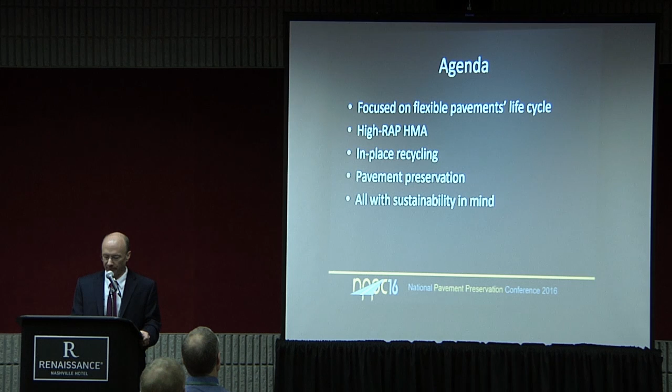Today I'm going to speak on the impacts of pavement preservation and recycled materials on sustainability. I'm going to focus primarily on the flexible pavement life cycle. I won't get into rigid pavement preservation. I'll talk about high RAP HMA. It doesn't exactly fit into pavement preservation, but I think it's relevant for the overall topic. I'll give some examples on in-place recycling, traditional pavement preservation products, and then all of this with sustainability in mind.

I think we all know there's an inherent link between sustainable pavement and pavement preservation. It was asked earlier, what's a definition of sustainability? Sustainable pavement is a safe, efficient, and environmentally friendly pavement, and it meets the needs of today while not compromising the needs of those of future generations. And then the definition of pavement preservation is really to maintain our pavement network in an acceptable, very cost-effective way that extends the life of the pavement, that meets the needs of the road users, all with safety in mind.

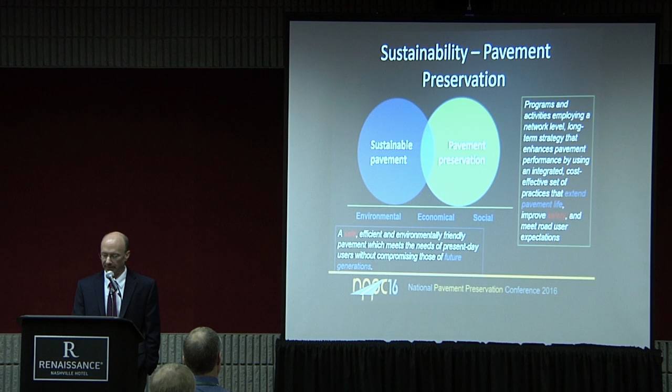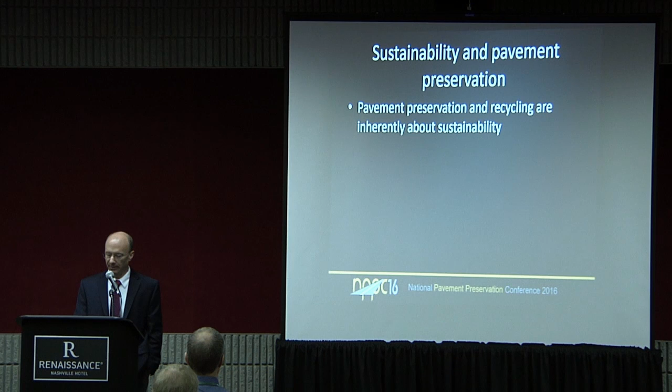I look at the two of those as having as its foundation the environmental, economical, and social aspects. So pavement preservation and recycling are inherently about sustainability. From an environmental standpoint, it's the use of resources and a reduction in emissions and energy like we just heard, and it can also be about using more environmentally friendly products.

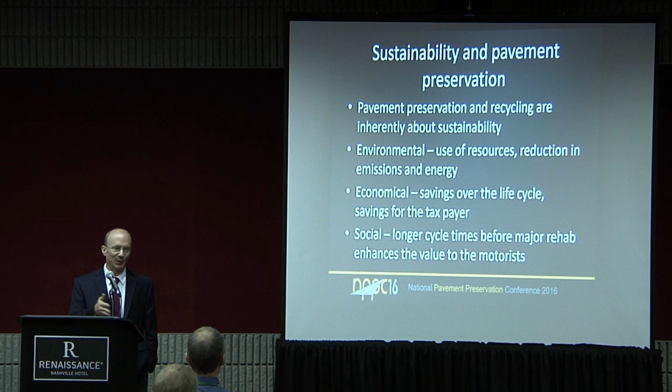Economically, there's a savings over the life cycle of the pavement as we're implementing pavement preservation, and that gives a savings for the taxpayer. And then socially, when we stretch out that time that we need to do some type of major rehabilitation to the pavement, that's enhancing the value to the motorist. If there's less delay due to construction, the more the motorist benefits.

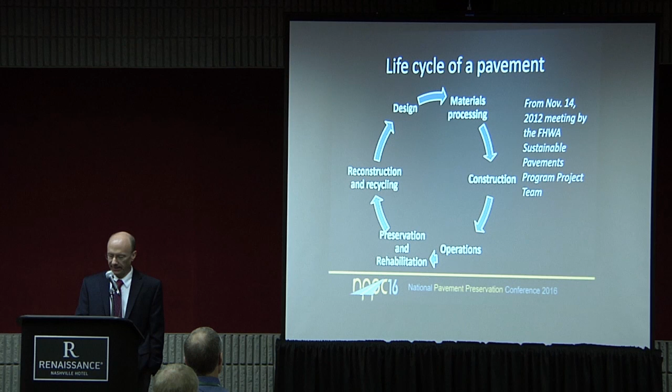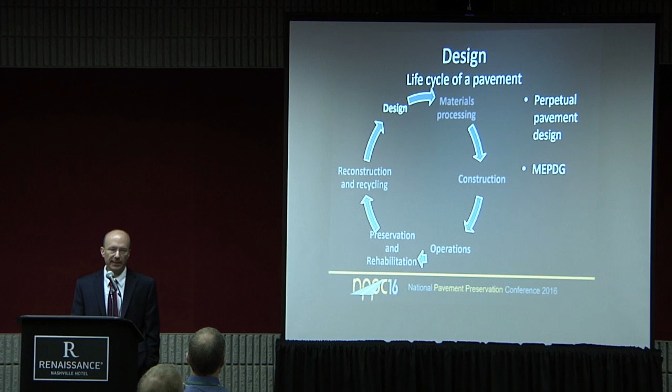So I'm going to talk about the various aspects of the life cycle of a pavement. I get this from an FHWA Sustainable Pavements Task Force where they looked at some of the key things in the life cycle. I'll talk about these individually, some more than others, and I'll start with design. When I say design here, I'm talking about pavement design, starting with some type of basic pavement structure. I won't hit on all the key aspects of pavement design, but we'll touch on perpetual pavement design and then the mechanistic empirical design as well.

I also want to point out that we want to ensure that the top layers are recyclable. Sometimes there's different products placed between layers that may not be as recyclable, and I'll talk about in-place recycling in a minute. And then there's also, from sustainability aspects, opportunities for high RAP in the high modulus rut-resistant layer.

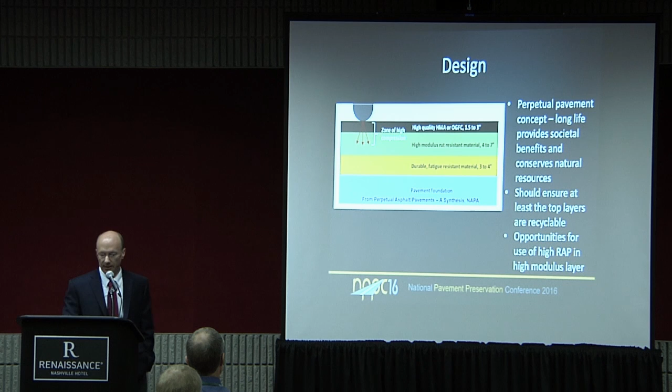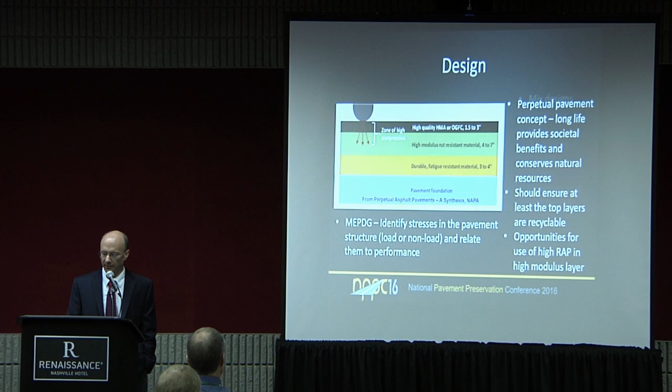Mechanistic empirical pavement design, essentially what that's doing is identifying stresses and strains in the pavement structure, load or non-load, and then relating those to performance. I'll talk about that a little bit more here in a second. Going on to materials processing, I'm focusing mostly on mix designs and materials selected in the mix design.

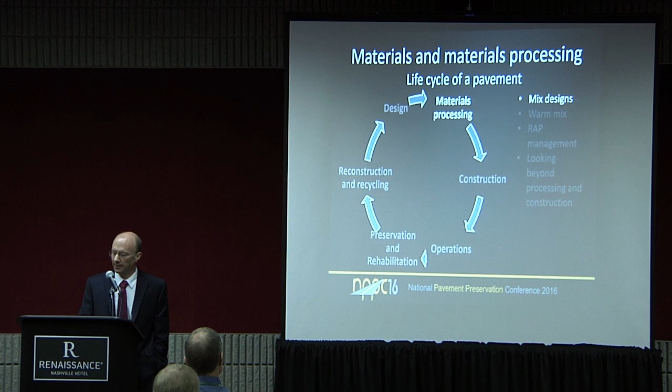There's a lot of other things related to materials, but I'll just stay on the designs here. A lot of people in our industry have probably heard a lot about this balanced mix design concept, where we have a great system in the superpave system where we're designing pavements volumetrically, but as we're getting very high RAP contents, which we'd like to do, now we're challenging the system a little bit in terms of durability.

So a lot of agencies and companies are looking at going beyond the volumetric mix design process and looking at performance-based mix designs. Again, very important when it comes to RAP and RAS, but now we can throw other things in there like rejuvenators, ground tire rubbers, and different things. There's a lot of progress being made in the industry, and a lot of different viewpoints too.

Beyond the mix design, there's also a lot on the characterization and binder testing that's helping us understand what are some key characteristics of the binder properties to give us a more durable pavement.

Some of the mix design tests here, you'll see, are for rutting. The rutting test, the Hamburg on the left, the asphalt pavement analyzer on the right. You don't tend to worry about rutting tests when we're putting high amounts of RAP - we're making it stiffer - but as we're putting rejuvenators in that system, we want to make sure we've not overdosed it in rejuvenator. So we're looking at rutting, and then we have cracking tests. I showed just two of them there, but there's really several cracking tests being used, and that's really, I think, what's helping us make sure we have enough asphalt content or the right rejuvenator in the system - looking at those cracking tests that tell us a lot about durability.

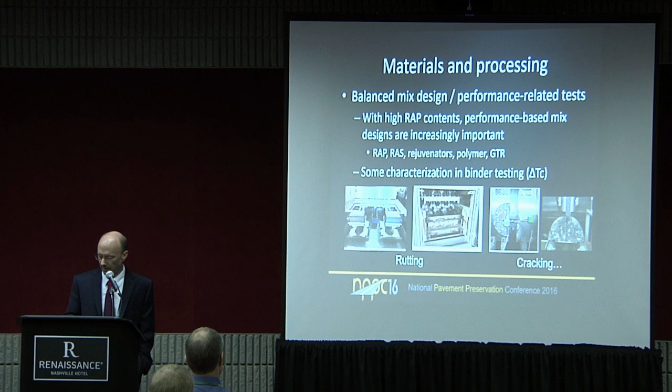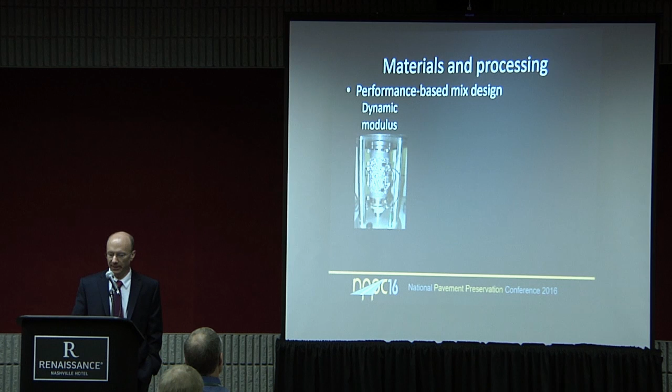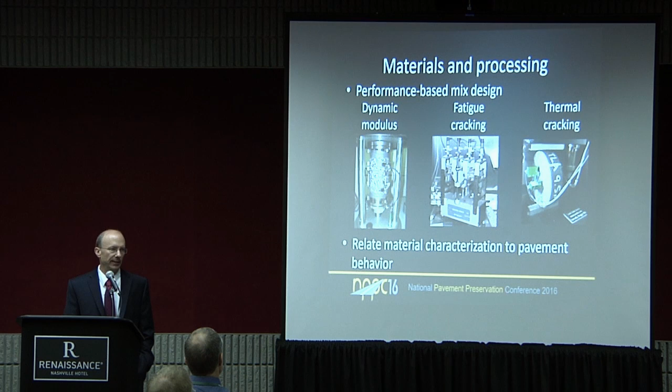From a performance-based mix design, and this is getting more into the mechanistic empirical, we have dynamic modulus, fatigue cracking, and thermal cracking. Again, this is just relating the material characterization to pavement behavior, but these are tools we can use as we're putting high recycle contents into a mix - if these are working correctly, we should be able to see what's the limit on the amount of recycled material, or tell us a lot about the asphalt content.

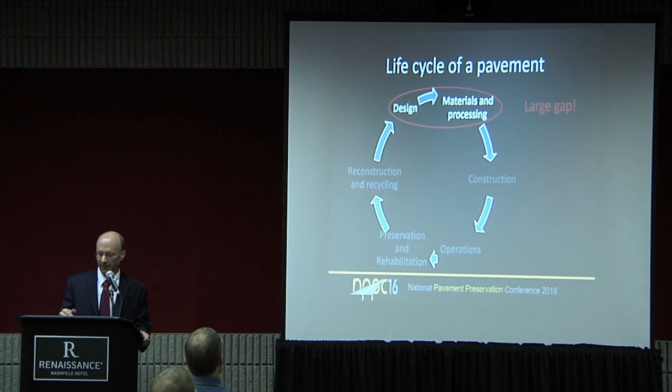But there is a large gap between what we're doing on the pavement design and what we're doing in the mix design and the materials. You look at how DOTs are organized, there's not normally a link there. As we're designing these systems, the pavement designers and the mix designers aren't really communicating. So there's a lot of opportunity there for improvement.

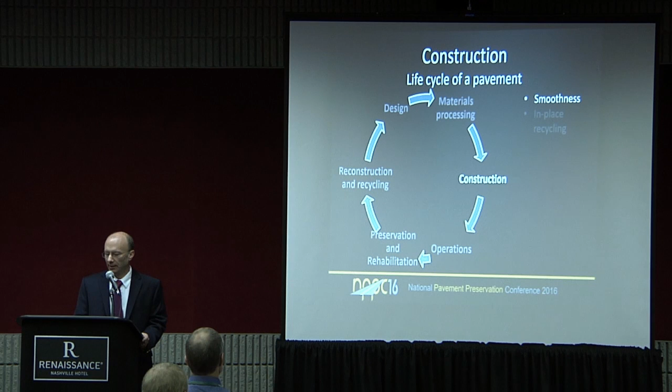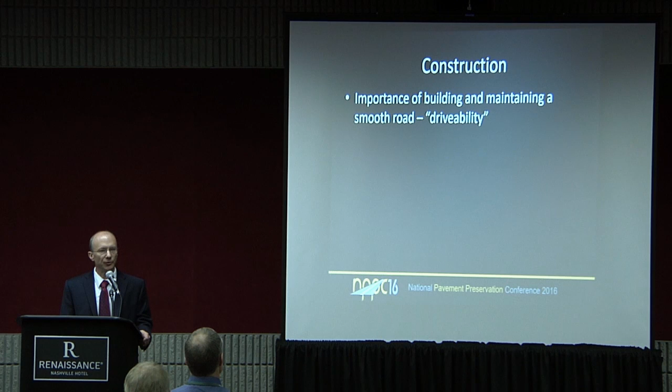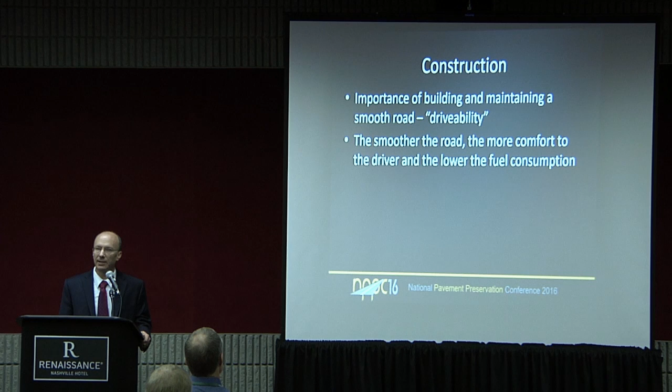Going on to construction and the life cycle, I'm going to talk more about smoothness here, but there's an importance in building a smooth pavement, we know that, but also as we're doing these preservation treatments, we're helping to maintain that smooth road for the drivability aspects for the motorist. So the smoother the road, the more comfort for the driver. There's been a lot of studies showing the lower the fuel consumption is, so some environmental benefits there as well.

In-place recycling has the potential to reduce reconstruction time, and I'll show some examples here in a little bit. And again, as we know, pavement preservation keeps good roads good.

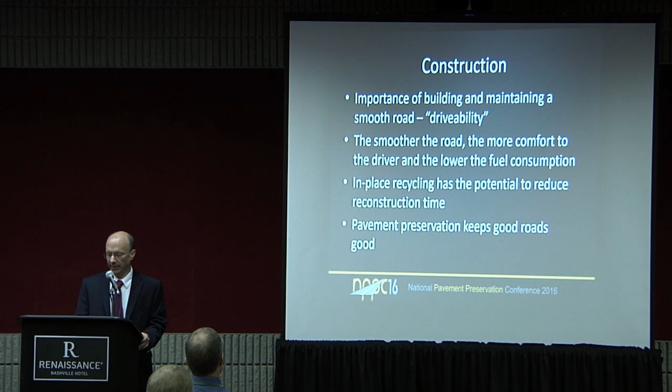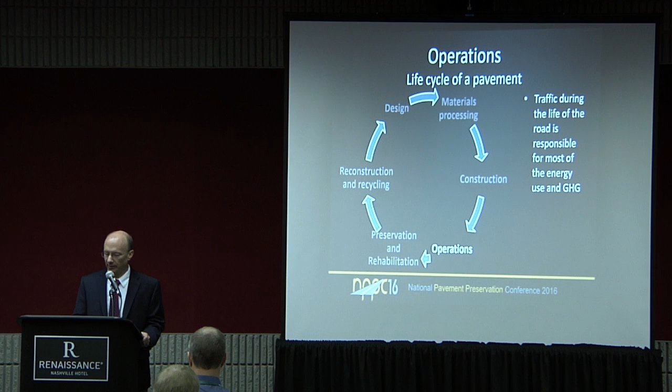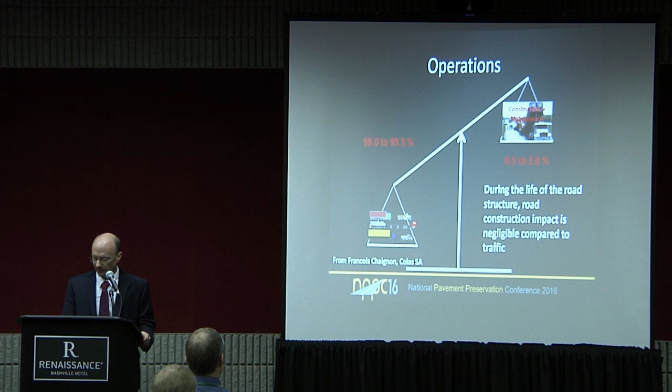On the operations side, I'm looking here at either construction or maintenance of the road, or just the operation of the road in relation to traffic. Really, traffic during the life of the pavement is what's using most of the energy and greenhouse gas - 98 to 99% of emissions and energy from traffic over the life of the road - but I know our focus here is more on construction and maintenance.

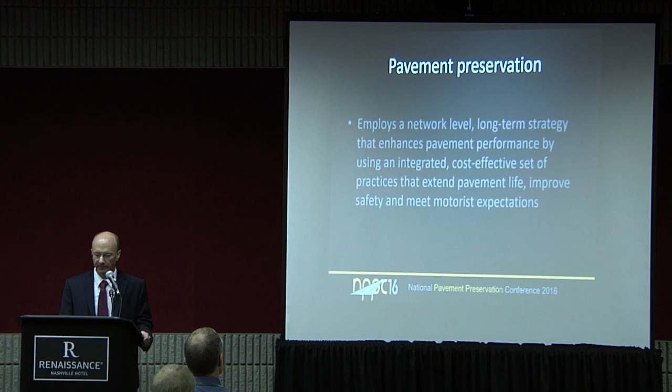So on preservation and rehabilitation, let's go through some things here. I won't go through the definition again of pavement preservation, but we're using products like chip seals, microsurfacing, crack sealing, and thin in-place recycling to help us in those preservation goals.

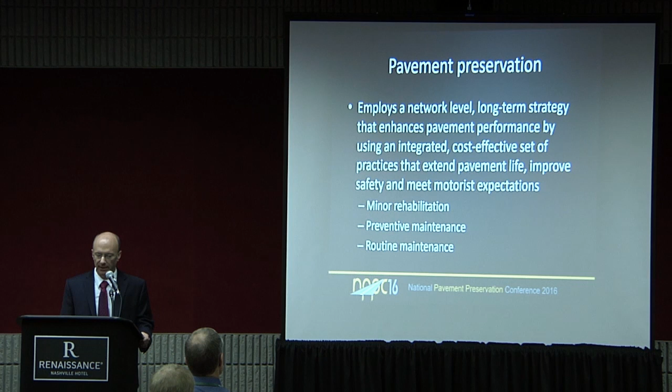I'll focus more on the traditional preservation products here, looking at a study that Gary Hicks did in 5 states, which he presented at a 2010 California Chip Seal Association meeting. They looked at the life extensions of preservation treatments on flexible pavements, and for chip seals they found a range of life extension: chip seals 4 to 8 years, slurry seal 3 to 7, micro 3 to 8 years, and crack sealing 0 to 4.

And a separate NCHRP study found that Thinlay had a life extension of 7 to 11 years.

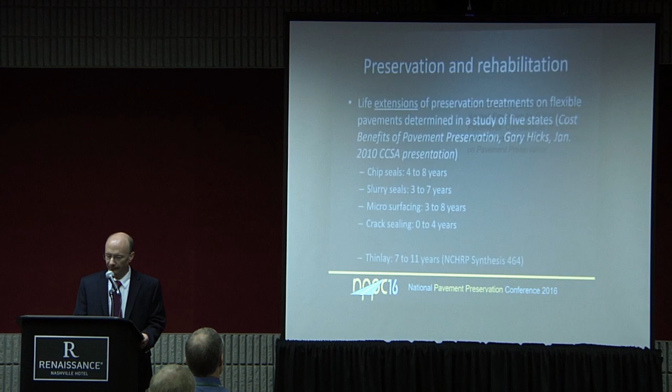Going to a separate study now looking at the emissions of 3 products. If you look at the double chip seal, that's just 2 layers of chip seal, or microsurfacing, they have about the same emissions data and energy use. Thin wearing course has quite a bit more in emissions and energy.

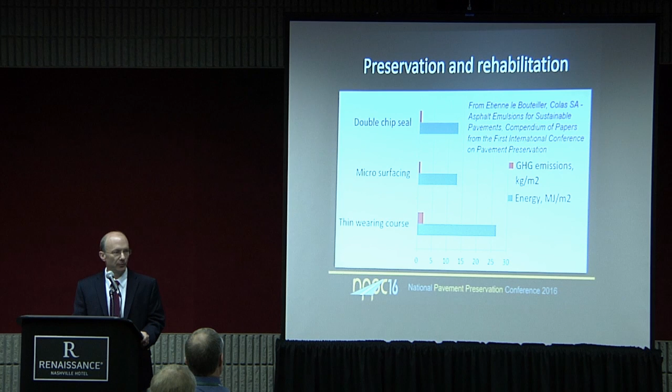But if you think of the previous slide with the life extensions, they had different life extensions - take the mid range: double chip seal 7, micro 6, and thin HMA 9. That difference is narrowed from what it was. We still see the double chip seal and micro having very equivalent data. The thin wearing course now, per year emissions and energy has come down, but it's still more than what we see in micro and chip seal.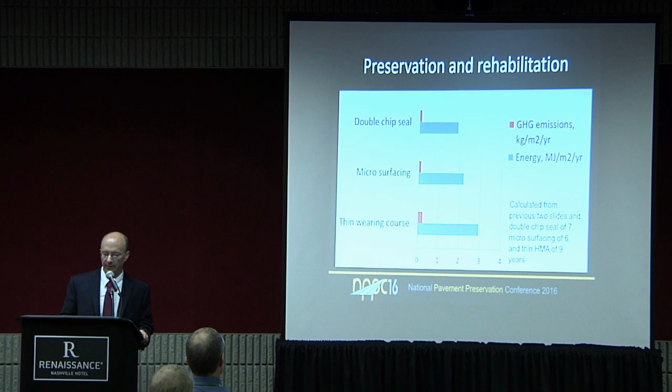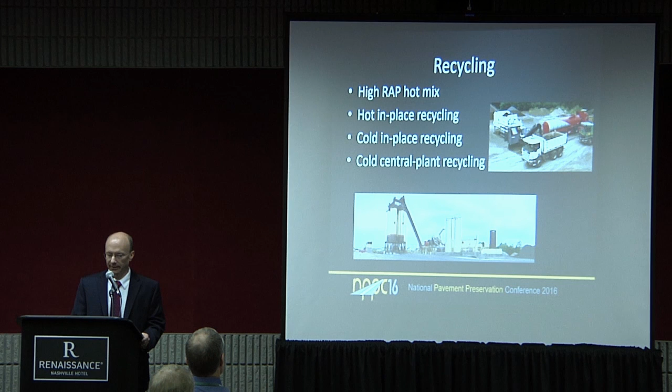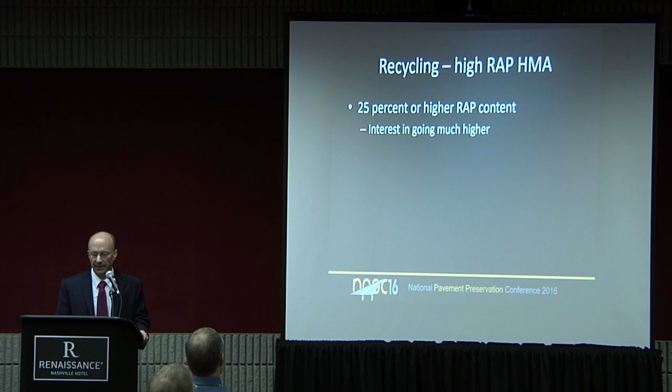Reconstruction or recycling. Talk about high RAP HMA again - hot in place recycling, the 2 cold recycling techniques, and full depth reclamation, and some more emissions and energy data here. So looking at RAP, typically high RAP is considered in a mix to be 25% or higher.

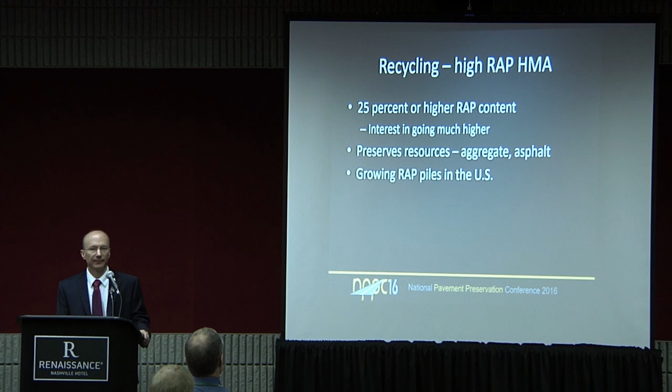There's a lot of agencies pushing that upper limit to 40 or even 50%. I think we know that's preserving resources, so we have less aggregate use and less asphalt use as we're using more RAP. It's also growing RAP piles in the U.S., and certainly around where I live and work, we're producing more RAP than what we're using.

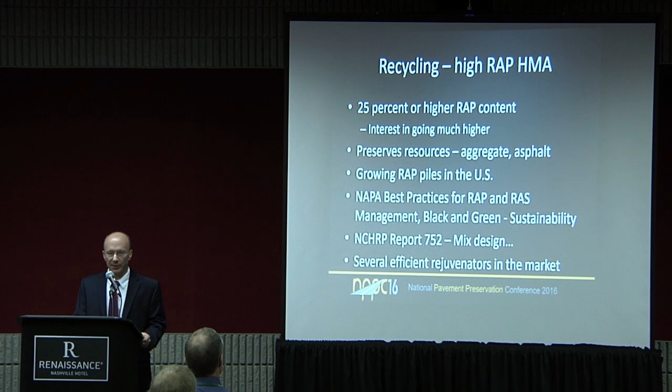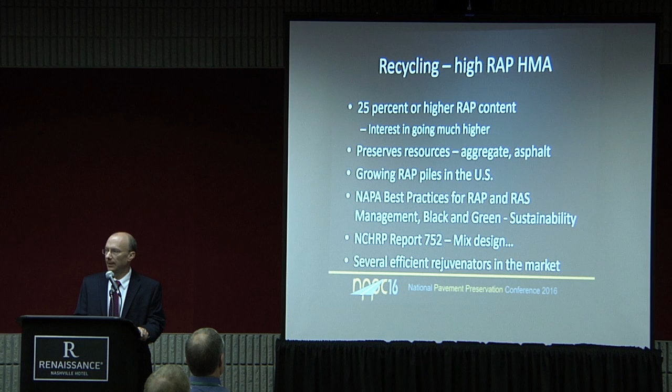NAPA has a lot of guidelines on using RAP and RAS in mix designs. They have the Black and Green Sustainability book, with a lot of useful references on how to get high amounts of RAP in the mix. There's also several efficient rejuvenators in the market - it touches on green chemistry aspects too. A lot of these green chemistry rejuvenators are very efficient, work very well, and have a lot of benefits. I wish I had more time to talk about that part.

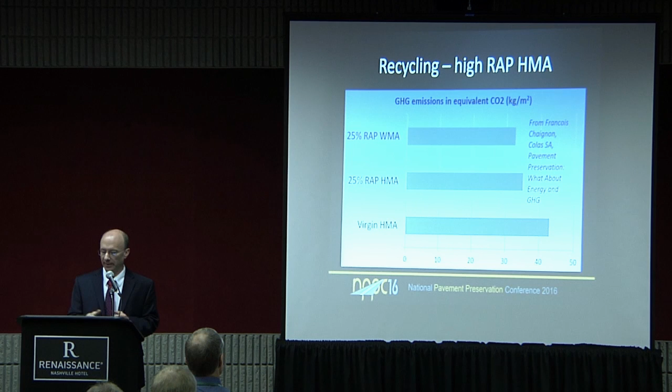Looking at the emissions and energy use of RAP mixes, you'll see the emissions data here with virgin HMA - it's going to have the most compared to, say, a 25% RAP HMA. Again, it's showing reduced emissions from using that RAP. And if you look at warm mix, which uses reduced temperatures to produce that mixture, that's going to be even less emissions as well.

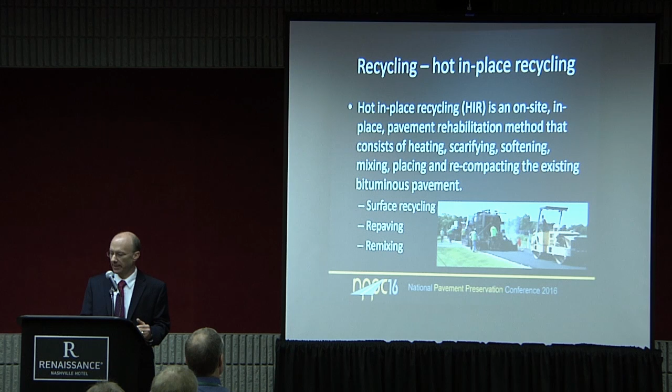Hot in place recycling - I don't have a lot of data here, but wanted to point this out. There's a lot of useful information in ARRA's Basic Asphalt Recycling Manual. It's on-site recycling of a pavement: you're heating it, scarifying it, maybe milling it, adding some type of additive, usually some type of rejuvenator, and then it's recompacted and used. There are 3 primary hot-in-place recycling methods, but I don't have a lot of time to go into those in detail.

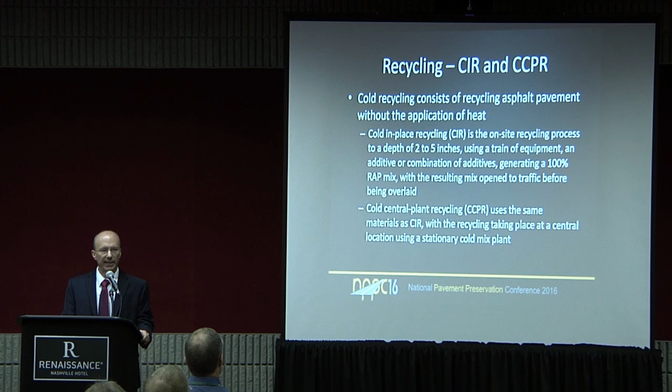From the cold recycling side, and you've heard a little bit of that this morning, there are 2 processes: cold-in-place recycling, and cold central plant. The in-place recycling method - think of a train of equipment. Let me make sure my picture is here.

You have a train of equipment that starts with a milling machine. It mills through the pavement, typically 2 to 5 inches in depth, staying within that asphalt layer, not getting into the underlying aggregate layers. Then it's put through the equipment, mixing it with an additive or combination of additives, usually asphalt emulsion or foamed asphalt, and then in the back it's going through a paver, compacted, and it becomes a base mixture that will be overlaid.

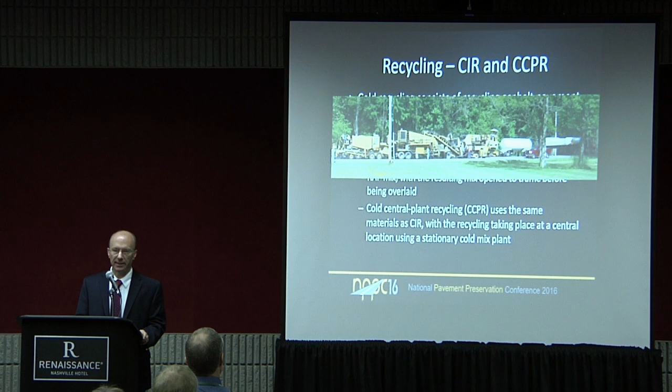In cold central plant, it's essentially the same materials, or RAP if you want to call it that - taking that RAP, using that same additive or combination of additives, again to make a base mix that'll be overlaid, but this is done at a stationary facility. Here you see where the RAP is being loaded into a mixing unit, then it's mixed and transported out to the job.

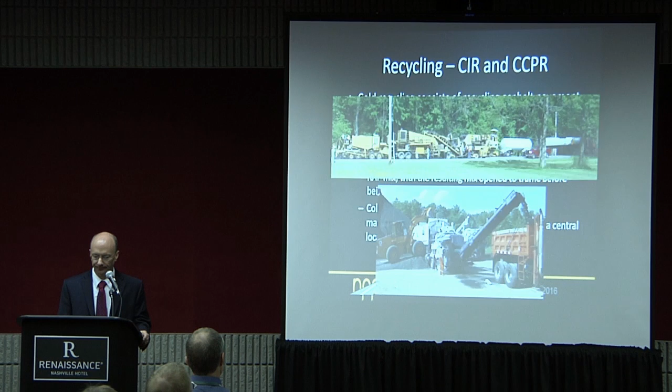To show you a little bit of data on that - Dr. Charles Schwartz from the University of Maryland has a presentation, I think it's tomorrow, where he's talking about this in a lot more detail. He's looking at what he calls FSB, or foam stabilized base, which is essentially using cold in place recycling or cold central plant recycling. So what he's done is looked at a flexible pavement structure, and he'll show you in the next slide.

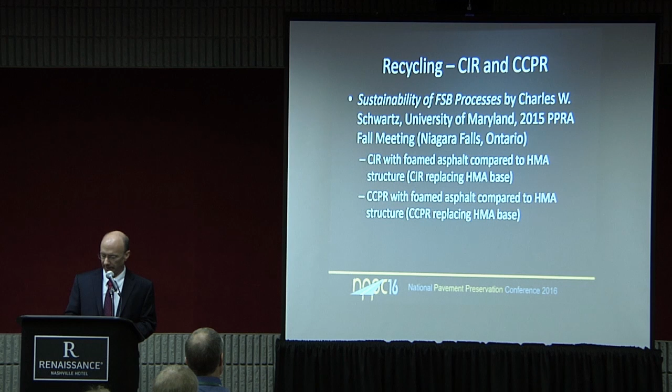We have a traditional structure on the left - a granular base with HMA base and an HMA surface. The right diagram shows taking that HMA base layer out and replacing it with the foam stabilized base layer, still getting the overlay of HMA. You can see on the right diagram it's a thicker structure, but overall the 2 structures are equivalent. If you look at the structural coefficient of the foam stabilized base, he used a value of 0.32. Traditionally, hot mix is 0.4, maybe a little bit higher than that.

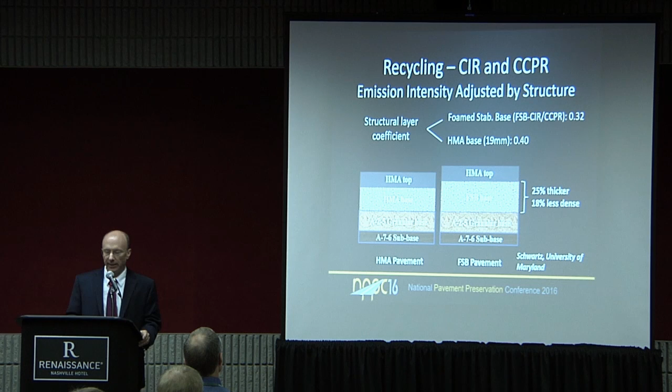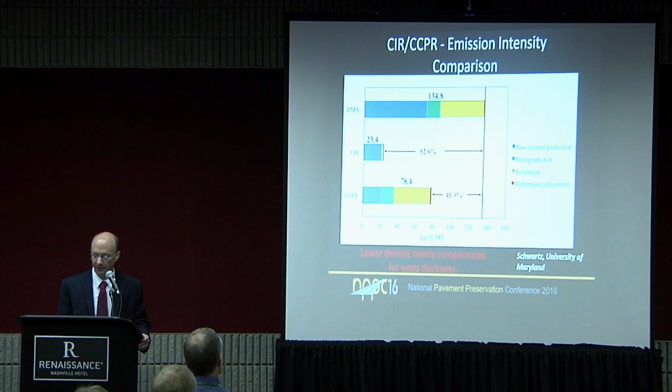So equivalent structures, now we're just replacing the HMA base. What he did in his study was look at the emissions data, and looking at emissions from a kilogram standpoint, it's 134 for the HMA. The next highest, the cold central plant, is 42% less than the HMA on an emissions basis. If you look at cold in place recycling, it's even less than the cold central plant, even less than half the CCPR. So we get huge savings in emissions. You can look at the color bars showing raw material production, plant production, installation, and what he calls a performance adjustment, which has more to do with the density of the materials.

So to summarize that study, the greenhouse gas emissions for cold central plant recycling were a 42% reduction from the baseline, and an 80% reduction for cold in place recycling compared to its baseline. So you do see a lot of environmentally friendly aspects of using in-place recycling.

A separate case study from France in 2007 used asphalt emulsion, on a county road there, with very similar data. The basic design started with an existing pavement that was milled to 7 centimeters in depth, then topped with a 4 centimeter asphalt binder course and a 6 centimeter wearing course. Their alternative design used in-place recycling, still going to 7 centimeters in depth on the recycle layer, but without transporting material away from the site. That was topped with a 4 centimeter asphalt wearing course.

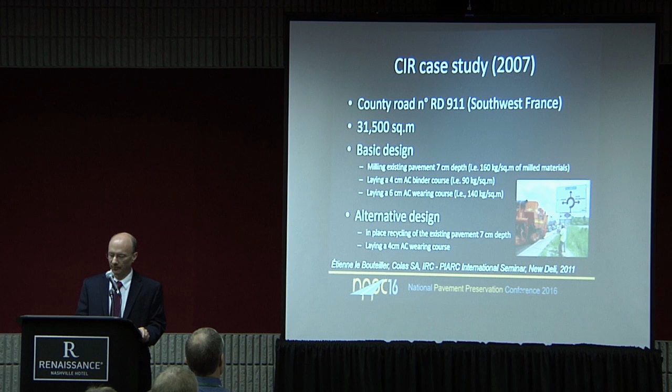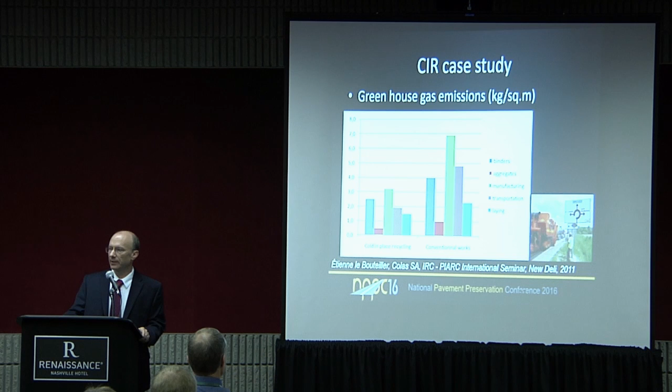Looking at the greenhouse gas emissions, you'll see quite a bit of reduction. The cold in-place recycling bars are on the left and the conventional treatment on the right. In every category, you'll see about a 40 to 50% reduction in emissions by using cold in-place recycling.

Looking at just the performance aspects, this data is from Washington State DOT, where they looked over a very long time period, going out to 10 or 12 years in their pavement management system. They have pavement structural condition, I don't think it's exactly PCI, plotted on the y-axis and age on the x-axis. It shows the performance of either the cold in place treatment, the red line, or the mill and fill treatment, the blue line. At 10 years, the pavement structural condition of the CIR is 80%, versus 40% for the mill and fill.

So we certainly see a lot of benefits of using CIR. It's not just an environmentally friendly product, it's also giving us enhanced performance. The question here is how can we take data like this, and I know a lot of people are starting to do it, and integrate that into pavement management systems to support the decision-making process to use more of these treatments.

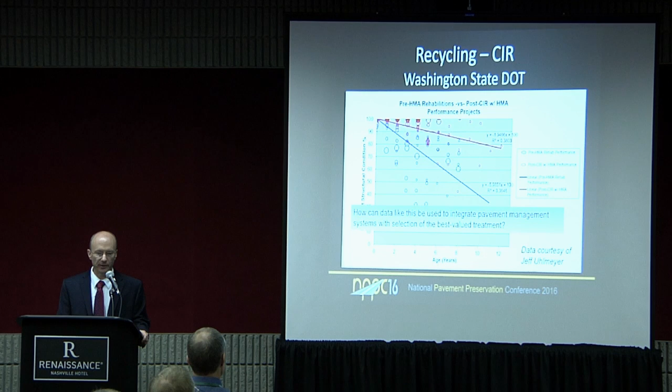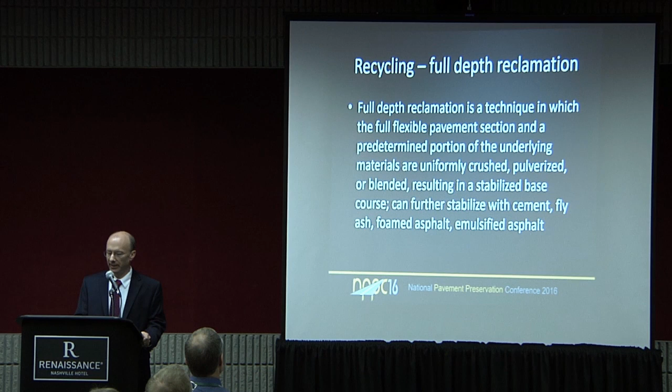Full depth reclamation is a little different from cold in place recycling. Now we're using a reclaimer, going through the asphalt pavement layers and into the underlying layers. We're crushing it, pulverizing it, mixing in an additive or combination of additives, and then it's recompacted and used as a flexible base, at least when asphalt emulsion or foamed asphalt is used.

I'll throw out a case study, though I don't have emissions or energy data on this one. It was published at TRB, on Washington Avenue in Las Vegas, Nevada. This was a road 0.7 miles long, 4 to 5 lanes wide, with a lot of residential areas around it, schools, businesses, and so on. They knew reconstruction in this setting was going to take a very long time, so they were looking at a reconstruction time of 120 days.

They considered the alternative of full depth reclamation, and when they did the project, it took 40 days, just 1/3 of the time. Traditionally in reconstruction they would remove all the aggregate base, replace it, and build the pavement back up to the curb line. With the full depth process, they still milled away all the asphalt layers, but then did in-place recycling to a depth of 6 inches, resulting in a better structure, reduced construction time, and a cost savings of 30%.

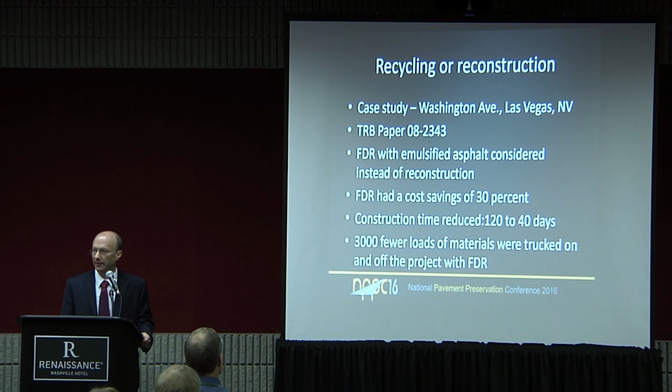And I think too, you think about material conservation. Just looking at the trucks that were on and off the road, they calculated there were 3,000 fewer loads of materials trucked on and off the project by using FDR. So I think that speaks a lot to the sustainability benefits of it.

More to summarize here, going into the gaps. Let me go back to the high RAP content design. There's been a lot of progress made on the binder properties needed to reduce durability issues when using high RAP, with or without rejuvenators. But more progress is needed, and there's a lot of studies underway.

More progress is needed on the mixture conditioning in terms of how we condition a mixture to simulate plant aging or field aging, and how we know what are the best tools to use and under what conditions when we test our mixes, so we have a very good relationship to what field performance is.

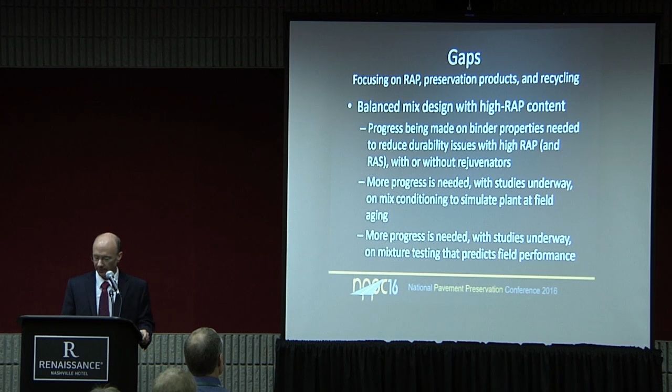From a mix design and pavement design standpoint, there's little to no integration between those two, and that's wasted resources. There's a lot of improvements that could be made there. I have a good reference from a 2009 TRB paper by Von Quintus and Hall on that topic as well.

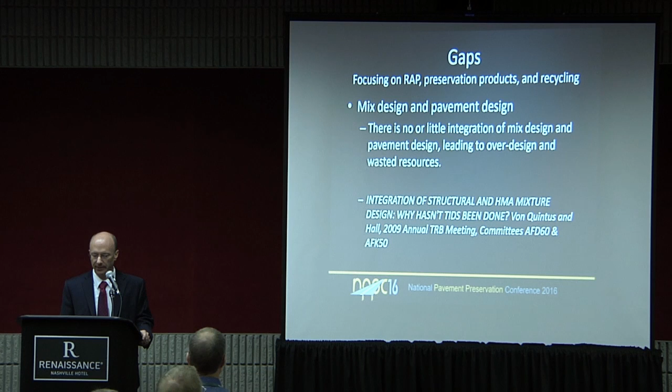Pavement preservation is really being used, I'd say, by most agencies. There's still progress needed in some areas, but also progress needed in integrating any kind of preservation process or recycling process into a pavement management system.

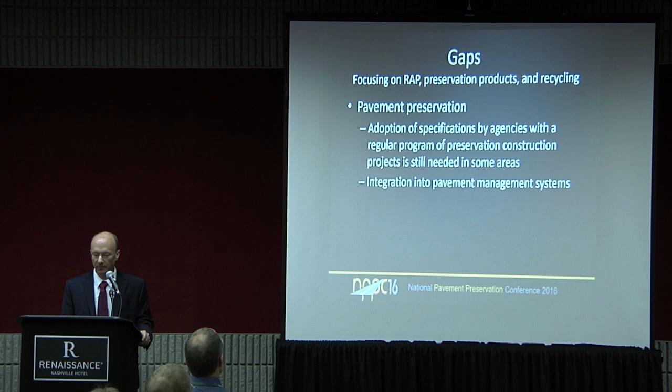In-place recycling needs adoption of specs by agencies with a regular program of projects. It's good to hear the San Francisco Bay Area story, where you had a goal you needed to meet and had to put projects out there to be bid. If we had more of that, I think we'd get contractors who'd say, I need to invest in equipment, I need to participate in that.

But there's really been a lot more resistance on in-place recycling in some parts of the country. I know there's people here who've done quite a bit of it in their areas, but I think as agencies spec it and have a regular program of doing it, you'll see more contractors getting that equipment.

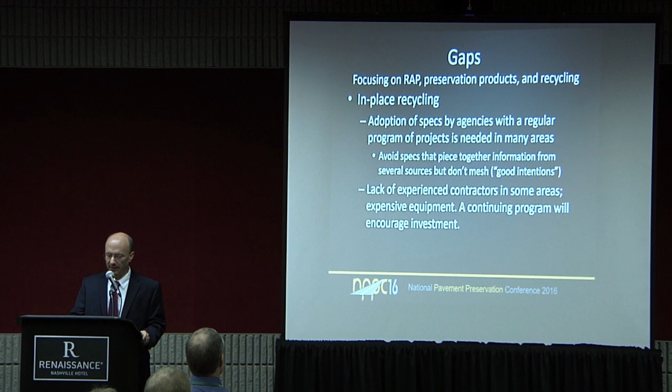I wanted to use this opportunity today to say avoid putting specs together by just grabbing a bunch of different specs out there and trying to piece it together. I've dealt with a lot of specifications where there were good intentions, trying to fuse what seemed to be the best aspects, but it ended up having a lot of contradictions and confusion. So I want to encourage that this doesn't happen.

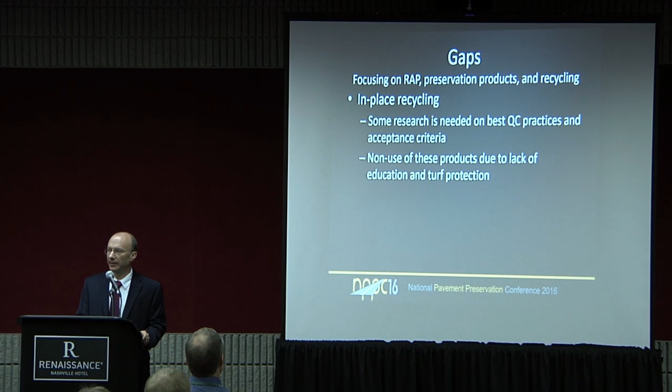There is some research needed on the best QC practices and acceptance criteria in place recycling. QC is probably down pretty good, but from a quality assurance standpoint, answering the question of how do I know what I designed in the middle of a construction job, there's some research needed there. In general, there's a non-use of in-place recycling due to a lack of education and in some ways turf protection as well.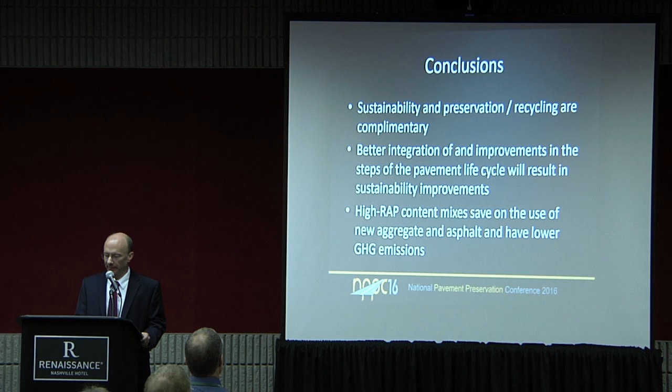So in conclusion, sustainability, preservation, and recycling are complementary. They are accomplishing the same goals. Better integration of and improvements in the steps of the whole pavement life cycle will result in sustainability improvements. High RAP content mixes save on the use of new aggregate and asphalt and also have lower emissions.

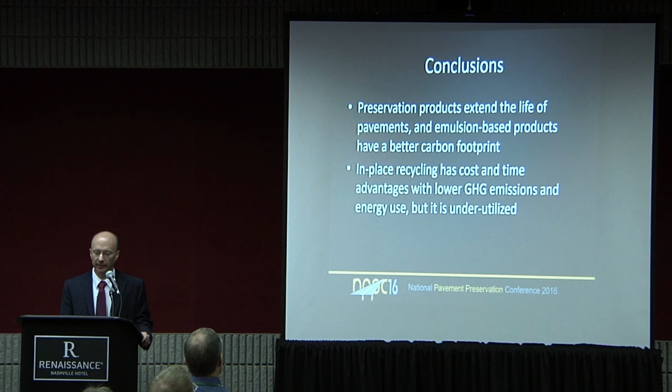Pavement preservation products extend the life of pavements, and emulsion-based products have a better or lower carbon footprint. In-place recycling has cost and time advantages with lower emissions and energy use, but it's underutilized. So with that, I thank you, and I'll answer any questions if you have any.

The question then is, how do you get specs implemented? You're required to put a spec, but you're getting input from different vendors or contractors. I think the bottom line is to go to ARRA, the Asphalt Recycling and Reclaiming Association. They'll work with you in helping to implement specifications that are, I guess I'll say, generic. I would reach out to them; you can find them at arra.org.

But they certainly have a lot of people there who can help you out. They have a technical director who is in the back of the room. Steve, will you raise your hand? He's the technical director from ARRA. So there are some of those resources out there.

Also, ARRA members have been active in the emulsion task force in implementing specifications through AASHTO. Now that's on emulsion; I'm sure similar could be done for foamed asphalt if that's what you're wanting. And it's for CIR and cold central plant, not for full depth yet, but I think there's ways to get that done. Any others? All right, well, thank you very much.